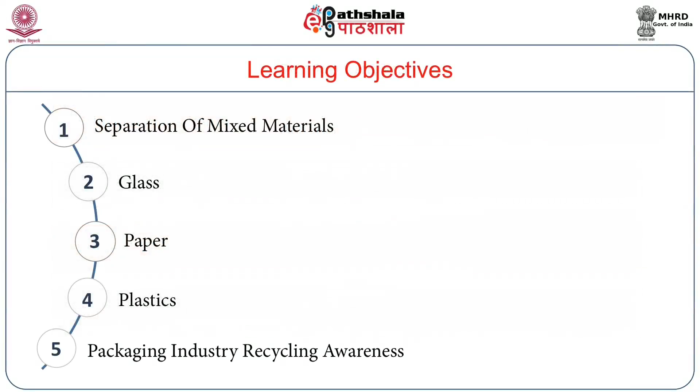Hello friends, in this module we will be learning about packaging waste disposal, how to dispose of and recycle packaging material so that it affects the environment less, reduces the cost of production of packaging material, and finally gives us a better earth.

Proper waste management is important to protect human health and the environment and to preserve natural resources. Recycling involves the collection of used and discarded materials, processing these materials and making them into new products. It reduces the amount of waste thrown into community dustbins, making the environment cleaner and the air fresher to breathe.

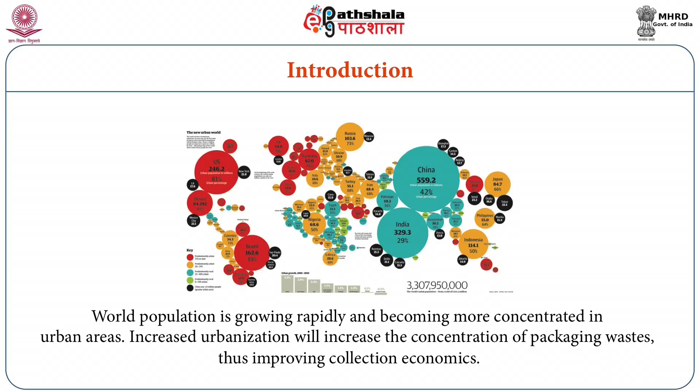World population is growing rapidly and becoming more concentrated in urban areas. Increased urbanization will increase the concentration of packaging wastes, thus improving collection economics. A United Nations study indicates that increased recycling rates are accompanied by job creation and improved living conditions.

Paper and board are the most extensively used packaging materials by weight. In the United Kingdom, paper and board account for 43% by weight of all packaging materials. Paper and board packaging make up 6.4% of the total content of typical household waste.

Plastics account for 20% of weight for all packaging. Glass accounts for 20% of the weight of all packaging, but only 10% of the goods are packaged in glass.

Major sources of packaging wastes are grocery stores, restaurants, and office buildings. Residential collection of waste material is growing, though sorting of the waste is often a major expense. Economic factors and governmental regulation are driving recycling.

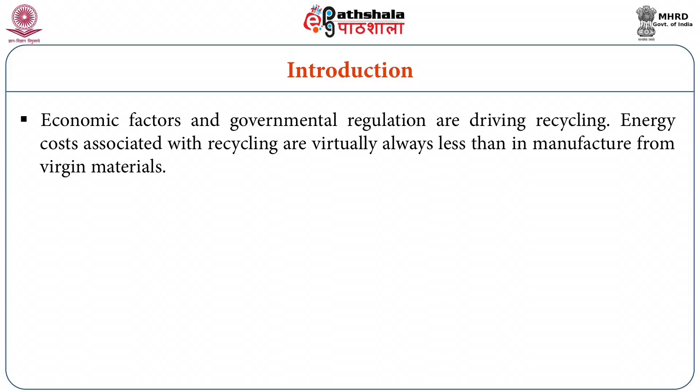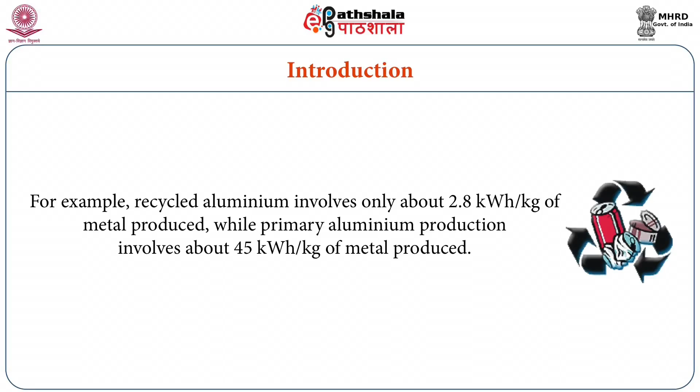Energy costs associated with recycling are virtually always less than in manufacture from virgin materials. For example, recycled aluminum involves only about 2.8 kilowatt hours per kg of metal produced, while primary aluminum production involves about 45 kilowatt hours per kg of metal produced.

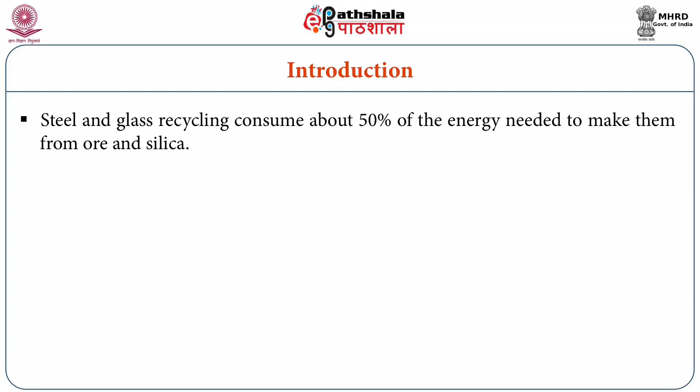Steel and glass recycling consume about 50% of the energy needed to make them from ore and silica respectively. Plastics recycling needs only 10 to 15% of the energy needed to refine petroleum and manufacture virgin resins.

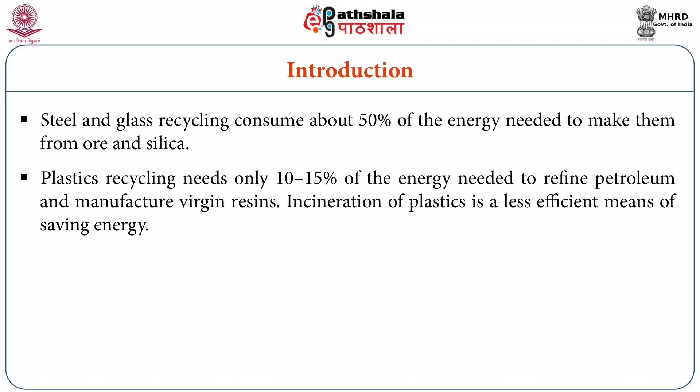Incineration of plastics is a less efficient means of saving energy. For example, 45.4 kg of HDPE has a fuel value of 19 kilojoules. Recycling saves twice this, 38 kilojoules.

Lower energy consumption linked with recycling reduces emissions of carbon dioxide, a greenhouse gas believed to be associated with global warming. For example, aluminum production by recycling generates only about 4% as much carbon dioxide as is created when virgin aluminum is produced.

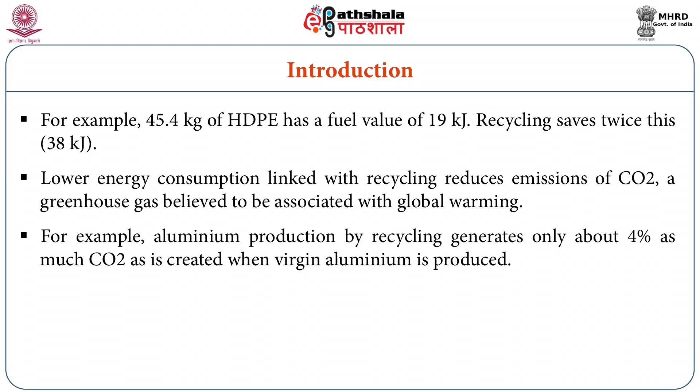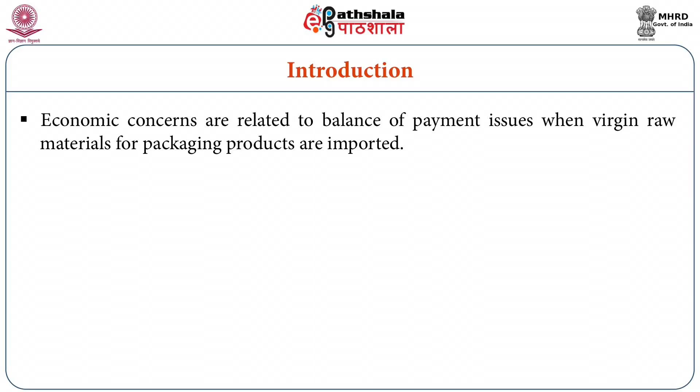Economic and environmental factors have both led to government regulations aimed at promoting recycling. Economic concerns are related to balance of payment issues when virgin raw materials for packaging products are imported. For example, in many countries, limited forest resources mean they have to import paper-based packaging, but recycling reduces these imports.

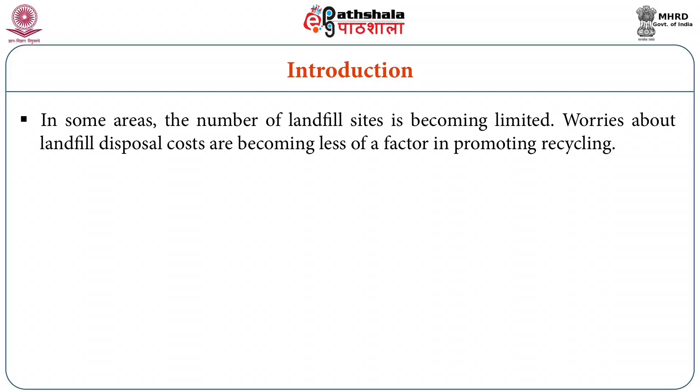In fact, Japan imports used paper products from the United States and elsewhere to recycle them. In some areas, the number of landfill sites is becoming limited. Worries about landfill disposal costs are becoming less of a factor in promoting recycling.

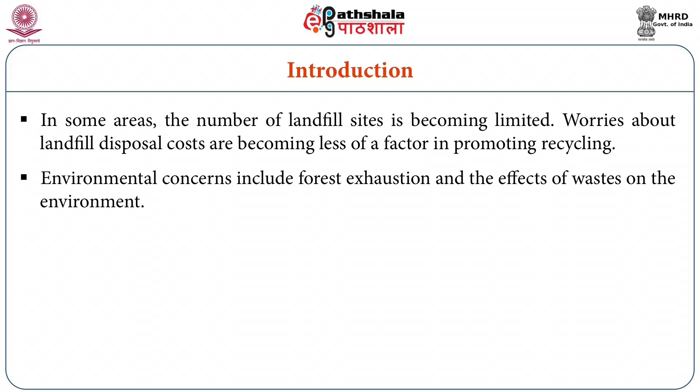Environmental concerns include forest exhaustion and effects of waste on environment. One concern receiving much publicity is the harmful effects that plastics, when eaten, can have on animal life, such as dolphins and even cows in India.

Separation of mixed materials: the municipal waste or any waste packaging materials come together, that is, the waste contains many types of materials like glass, paper, plastics, metal, etc. So how do we separate that?

Initially, the paper and paper-based products are separated manually, then the material is transferred to a conveyor which removes the metal by use of magnetic methods. Then finally glass and plastics are removed by gravity separation, and the plastic is finally sorted into different types like HDPE, LDPE, or PET, polyethylene, etc.

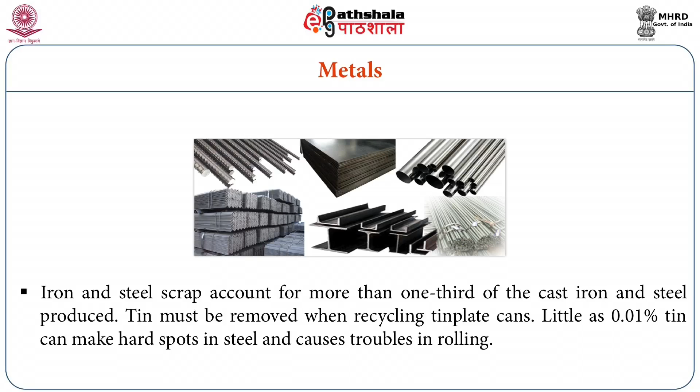Iron and steel scrap account for more than 1/3 of the cast iron and steel produced. Tin must be removed when recycling tin plate cans. As little as 0.01% tin can make hard spots in steel and cause trouble in rolling.

Therefore, only low levels of steel can scrap can be used directly in furnaces. By processing cans with hot caustic and oxidizing agent, tin can be removed from tin-plated steel cans.

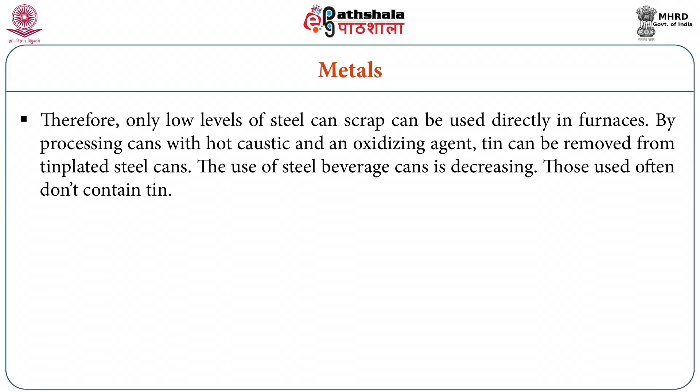The use of steel beverage cans is decreasing. Those used often do not contain tin. Therefore, few mills operate detinning operations. Can scrap can be used as precipitant in copper leaching mining.

Yet, this is a low volume application. Mini mills using electric arc furnaces use scrap iron and steel as their only feedstock.

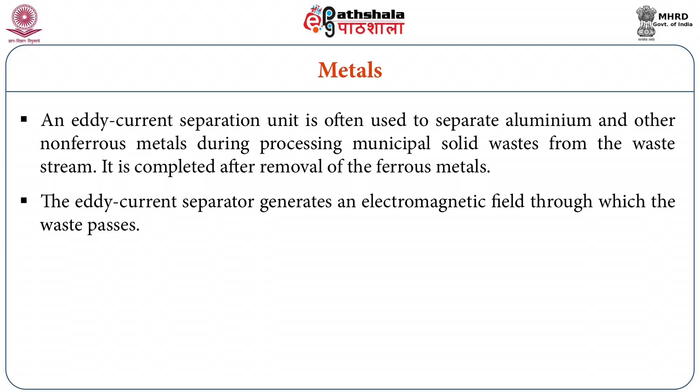An eddy current separation unit is often used to separate aluminum and other non-ferrous metals during processing of municipal solid waste from the waste stream. It is completed after removal of the ferrous metals. The eddy current separator generates an electromagnetic field through which the waste passes. The non-ferrous metals produce currents having a magnetic moment that is phased to repel the moment of the applied magnetic field. The repulsion causes the non-ferrous metal to be thrown out of the process stream, away from non-metallic objects.

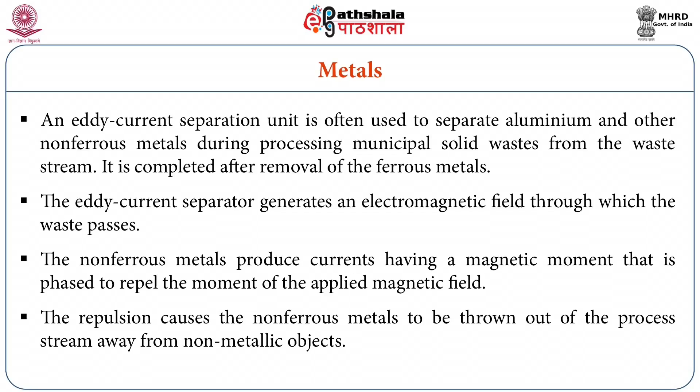Aluminum is the largest non-ferrous metal recycled. More than 95% of carbonated drink containers are two-piece aluminum cans. Aluminum is also used for aerosol containers and as a foil in plastic-paper laminates to package cereal and frozen foods. Aluminum is also used for food trays. All of these are found and collected from municipal solid waste.

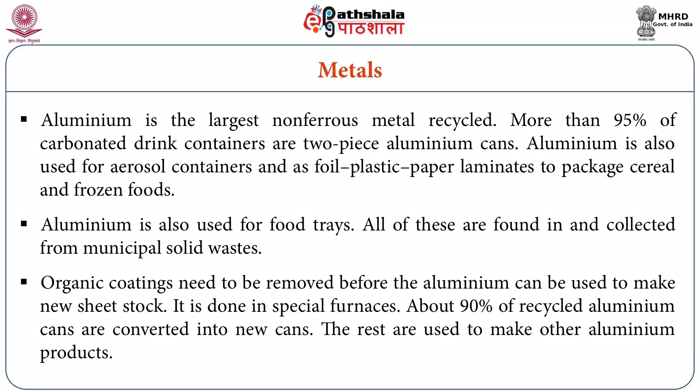Organic coatings need to be removed before the aluminum can be used to make new sheet stock. This is done in special furnaces. About 90% of recycled aluminum cans are converted into new cans. The rest are used to make other aluminum products.

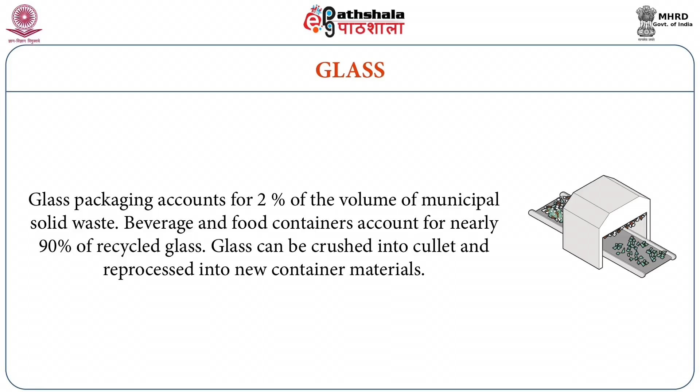Glass packaging accounts for 2% of the volume of municipal solid waste. Beverage and food containers account for nearly 90% of recycled glass. Glass can be crushed into cullets and reprocessed into new container materials. The recycling preserves sand and water, and uses 15% less energy than new production. However, the savings must be weighed against the cost of transporting the glass to the recycling facility.

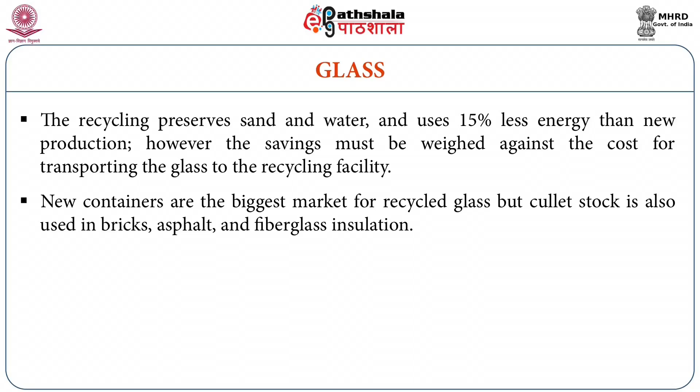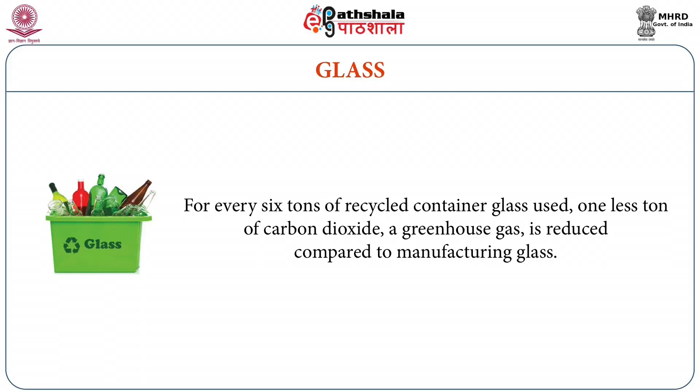New containers are the biggest market for recycled glass, but cullet stock is also used in bricks, asphalt, and fiberglass insulation. For every 6 tons of recycled container glass used, 1 less ton of carbon dioxide, a greenhouse gas, is reduced compared to manufacturing new glass.

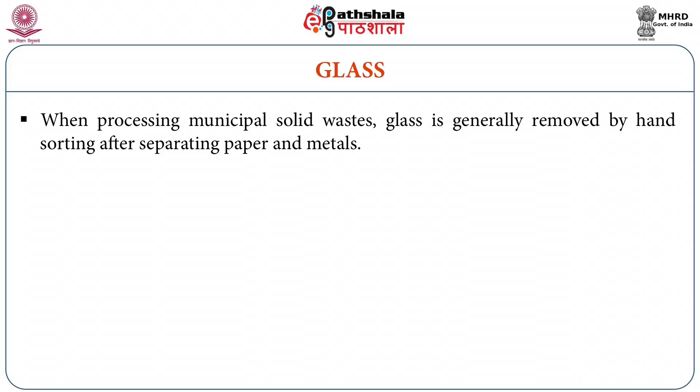When processing municipal solid waste, glass is generally removed by hand sorting after separating paper and metals. A mineral jig may be used to separate glass from the other particles. Particles should be less than 5 cm in their longest dimension. Glass occurs in the middle layer of the slurry formed by the mineral jig.

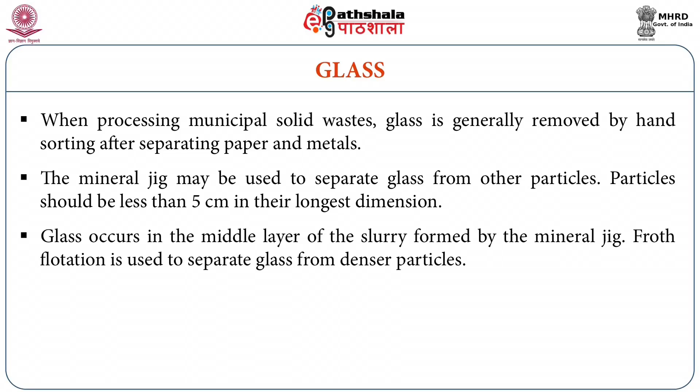Froth flotation is used to separate glass from denser particles. Froth flotation is most efficient for particles less than 850 micrometers in size. A cationic fatty acid amine surfactant has been used to improve the efficiency of froth flotation of glass.

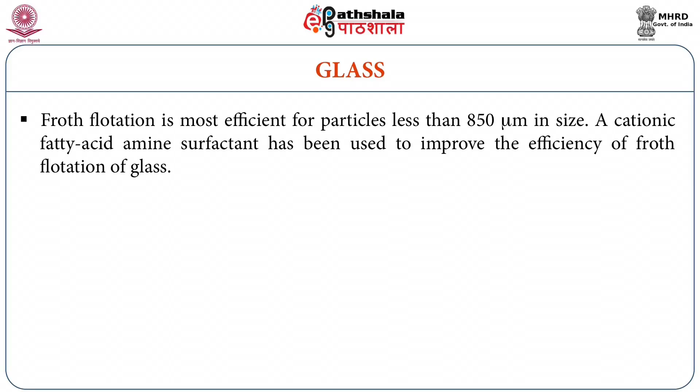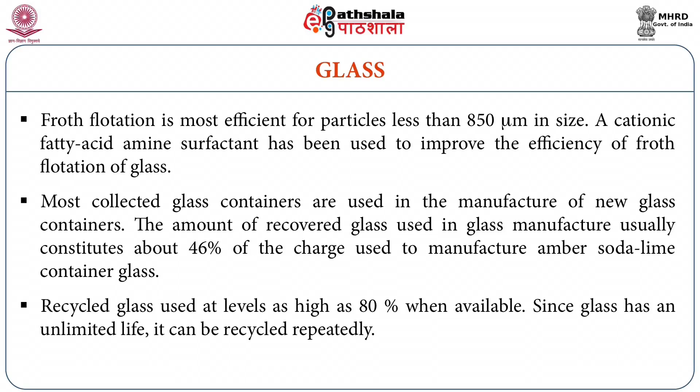Most collected glass containers are used in the manufacture of new glass containers. The amount of recovered glass used in glass manufacture usually constitutes about 46% of the charge used to manufacture amber soda lime container glass. Recycled glass is used at levels as high as 80% when available. Since glass has an unlimited life, it can be recycled repeatedly.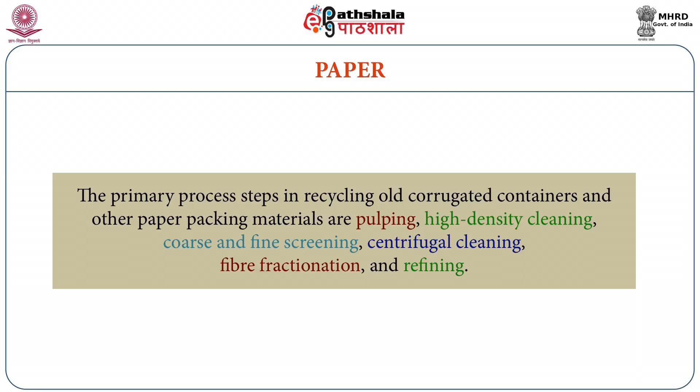Paper. The primary steps in recycling old corrugated containers and other paper packaging materials are pulping, high density cleaning, coarse and fine screening, centrifugal cleaning, fiber fractionation, and refining.

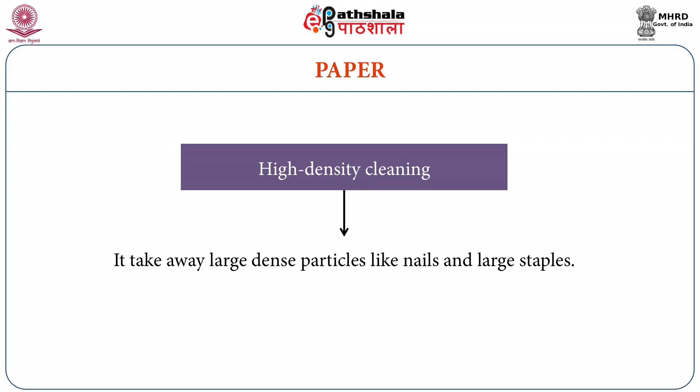Pulping disintegrates the containers into individual fibers dispersed in water. High density cleaning takes away large dense particles like nails and large staples. Coarse screening removes big low density contaminants like unpulped tape and large adhesive particles, if any.

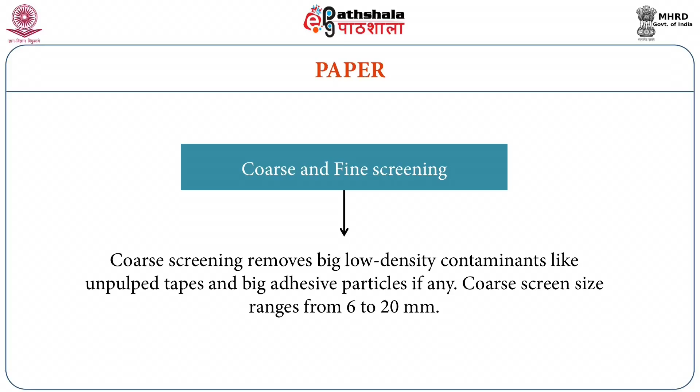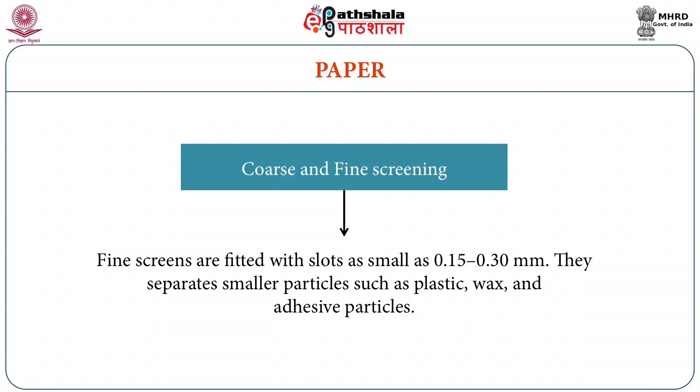Coarse screen size ranges from 6 to 20 mm. Fine screens are fitted with slots as small as 0.15 to 0.3 mm. They separate smaller particles such as plastic, wax, and adhesive particles.

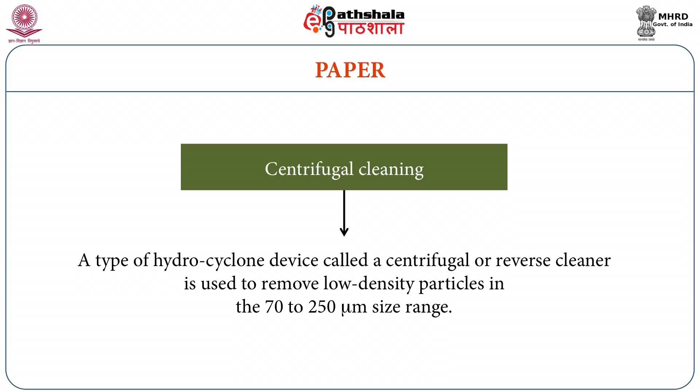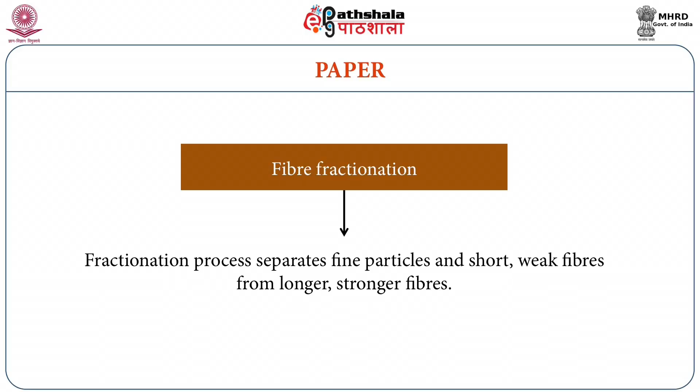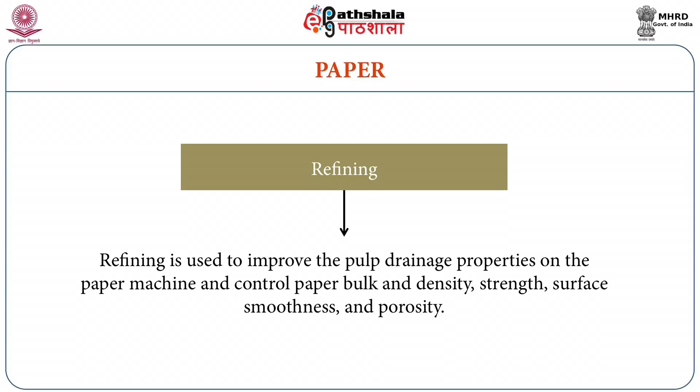A type of hydrocyclone device called a centrifugal or reverse cleaner is used to remove low density particles in the 70 to 250 micrometer size range. Fractionation process separates fine particles and short, weak fibers from stronger fibers. Refining is used to improve the pulp drainage properties on the paper machine and control paper bulk density, strength, surface smoothness, and porosity.

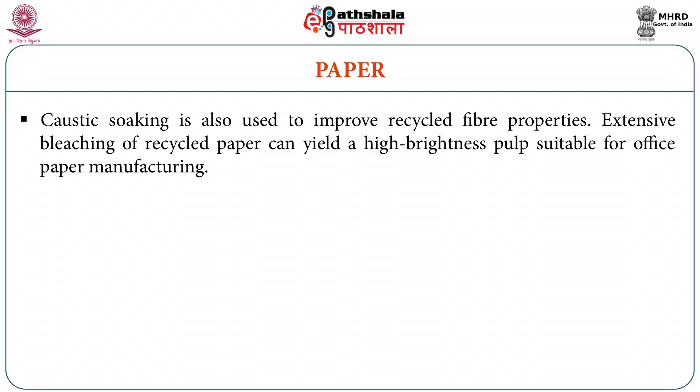Caustic soaking is also used to improve recycled fiber properties. Extensive bleaching of recycled paper can yield a high brightness pulp suitable for office paper manufacturing.

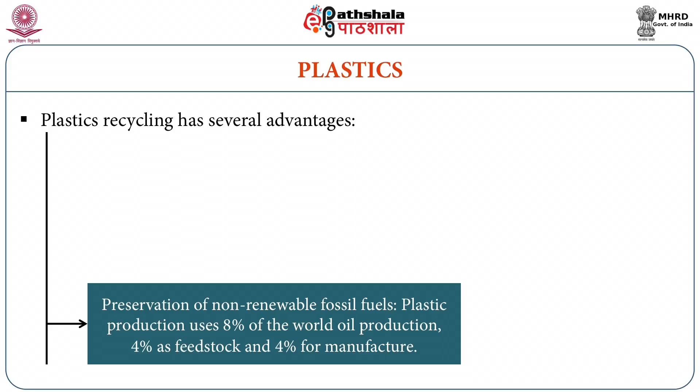Plastics. The recycling of plastic has several advantages: preservation of non-renewable fossil fuels. Plastic production uses 8% of world oil production, 4% as feedstock and 4% for manufacture. Other benefits include reduced intake of energy and reduced emission of carbon dioxide, nitrogen oxide, and sulfur dioxide.

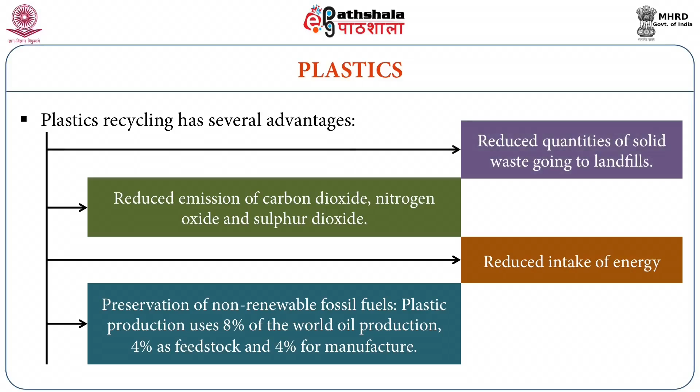Reduced quantities of solid waste going to landfills.

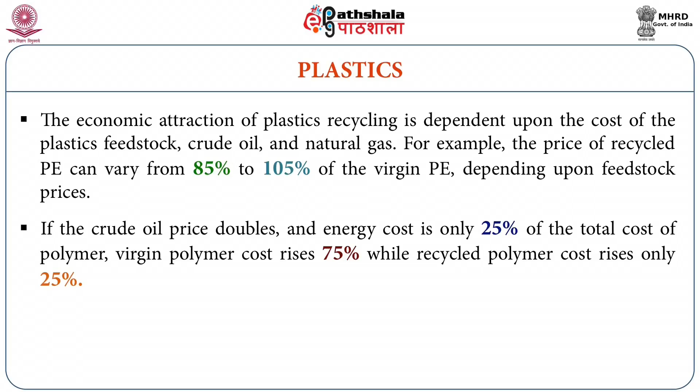The economic attraction of plastics recycling is dependent upon the cost of plastic feedstock, crude oil and natural gas. For example, the price of recycled polyethylene can vary from 85% to 105% of virgin polyethylene, depending upon feedstock prices. If the crude oil price doubles and energy cost is only 25% of the total cost of polymer, virgin polymer cost rises 75%, while recycled polymer cost rises only 25%.

There are many problems in the recycling of plastic wastes. A range of different types of plastics are used. The plastics contain a wide range of additives, and many objects contain plastics as well as other materials. The sorting of plastics is a difficult, unhygienic and expensive process.

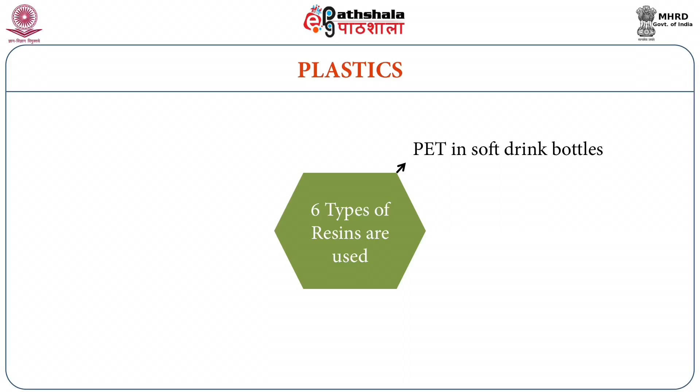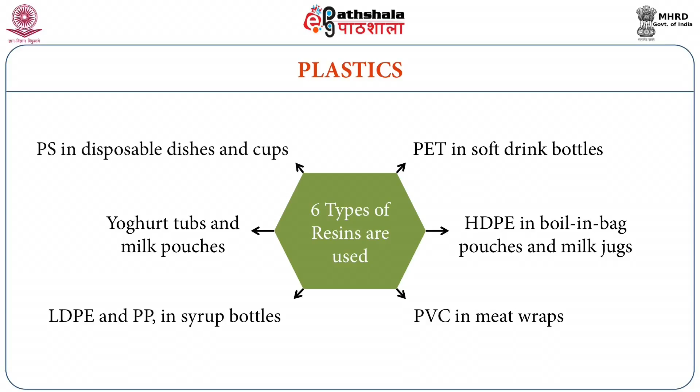Recycling of plastic packaging, which makes up about 9% of municipal solid waste, is a comparatively new process. Usually 6 types of resins are used: PET in soft drink bottles, HDPE in boil-in-bag pouches and milk jugs, PVC in meat wraps, LDPE and PP in syrup bottles, yogurt tubs and milk pouches, and PS or polystyrene in disposable dishes and cups. The plastic is sorted by type before it can be recycled.

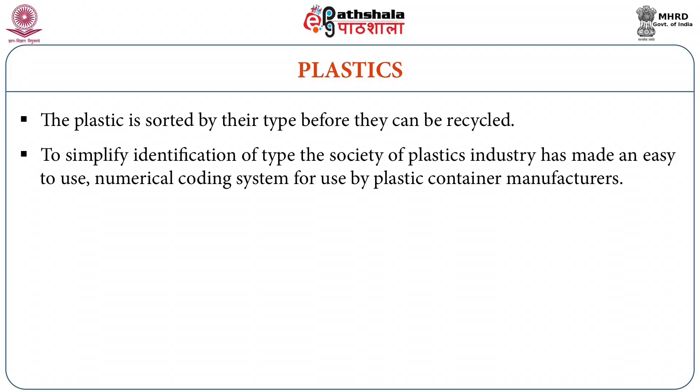To simplify identification of type, the Society of Plastics Industry has made an easy-to-use numerical coding system for use by plastic container manufacturers.

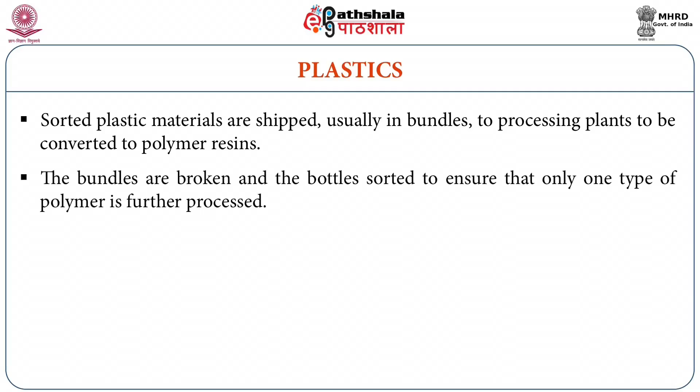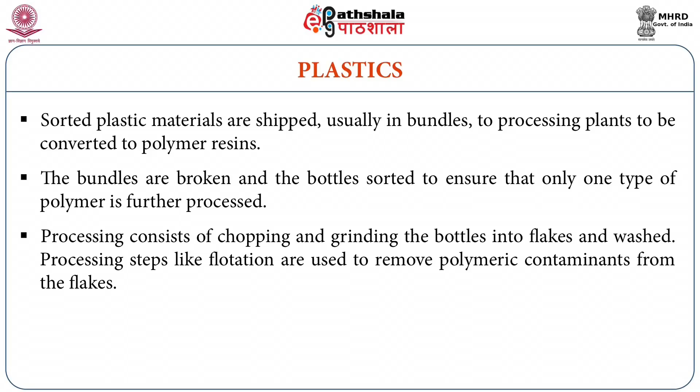Sorted plastic materials are shipped usually in bundles to processing plants to be converted to polymer resins. The bundles are broken and the bottles sorted to ensure that only one type of polymer is further processed. Processing consists of chopping and grinding the bottles into flakes, which are washed. Processing steps like flotation are used to remove polymeric contaminants from the flakes. The flakes are melted and converted into pellets.

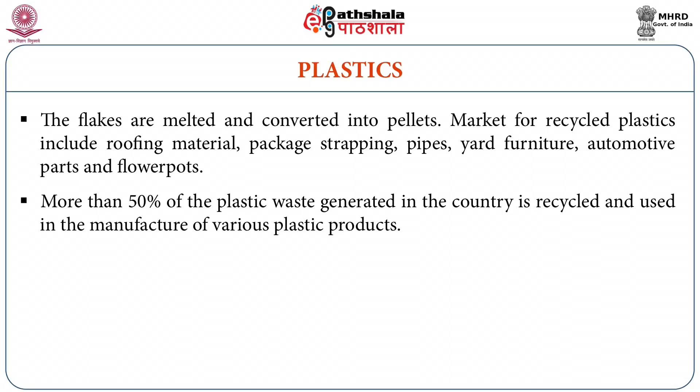Markets for recycled plastics include roofing material, package strapping, pipes, yard furniture, automotive parts, and flower pots. More than 50% of the plastic waste generated in the country is recycled and used in the manufacture of various plastic products. Designing eco-friendly, biodegradable plastics is the need of the hour.

However, partially biodegradable plastics have been designed and used. Completely biodegradable plastics based on renewable starch rather than petrochemicals have only recently been developed and are in the early stages of commercialization. There is a high level of awareness across the packaging industry.

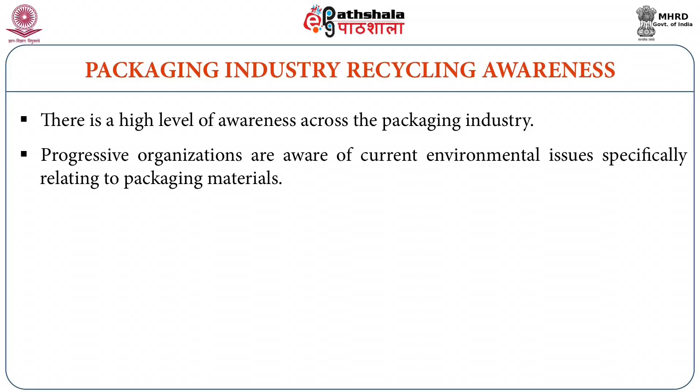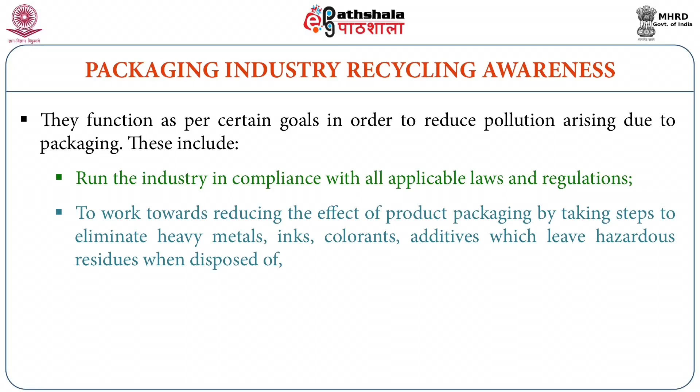Progressive organizations are aware of current environmental issues specifically relating to packaging materials. They function as per certain goals in order to reduce pollution arising due to packaging. These include running the industry in compliance with all applicable laws and regulations, and working towards reducing the effect of product packaging by taking steps to eliminate heavy metals, inks, colorants, and additives which leave hazardous residues when disposed of.

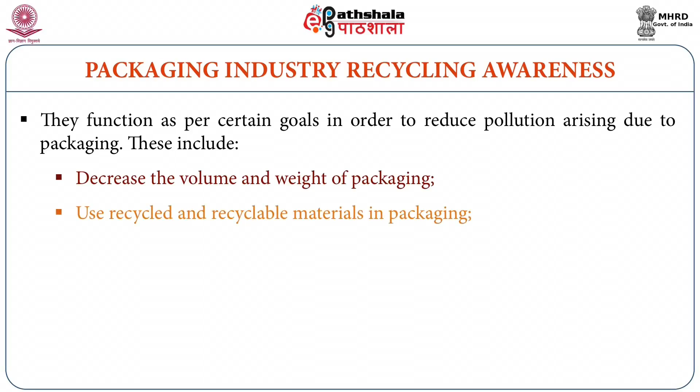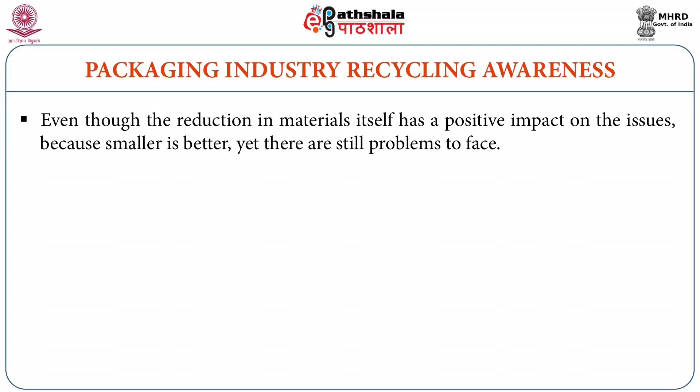Decrease the volume and weight of packaging. Use recycled and recyclable materials in packaging. Support efforts to train consumers on how they become part of the recycling solution. Even though the reduction in materials itself has a positive impact on the issues, because smaller is better, yet there are still problems to face.

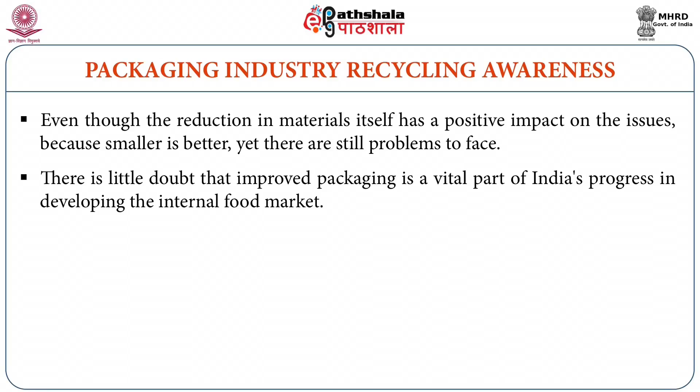There is little doubt that improved packaging is a vital part of India's progress in developing the internal food market. The best sort of packaging is that which can be used a number of times, such as second-hand pallets, reusable plastic crates, cardboard or wooden boxes, milk bottles, etc.

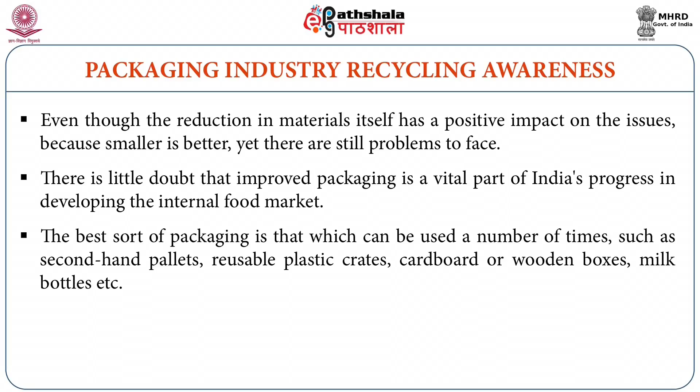The challenge for the packaging industry will be for all the relevant people to work together to address the increasing global regulatory policies on food contact safety, reducing atmospheric pollution during package manufacture, and dealing effectively with package waste management by recycling. Needless to say, these objectives can be met only when all three segments of the packaging industry, namely the material manufacturer, converter and user, work together in an integrated manner.

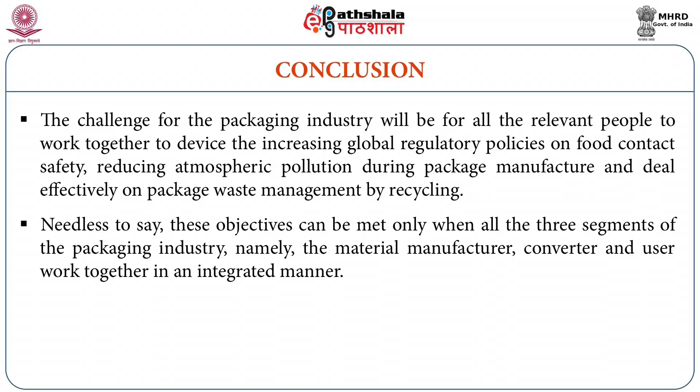So, if we want to save Mother Earth, then we need to recycle the packaging material. It is also beneficial for the consumers, producers and the converters. For example, if we recycle the materials, the cost of production of recycled material is less, as in the case of glass. For example, glass, if we take it, is less costly compared to glass made from silica.

The same happens with plastics also. So if we recycle the material, then we will save the cost also, we will save the environment also, we will reduce the pollution. But that has to be checked properly, whether such recycled material can be used for food contact surfaces or not. If not, then they can be used for other purposes where such kind of problems does not occur.